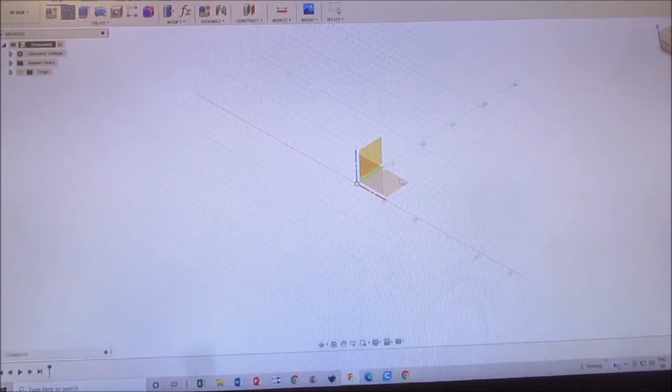And here we are in full screen. I'm going to start off with a sketch, put it on the top view. There it is. And this is set on millimeters, I believe. Yep, okay, so we're going to start off with a sketch.

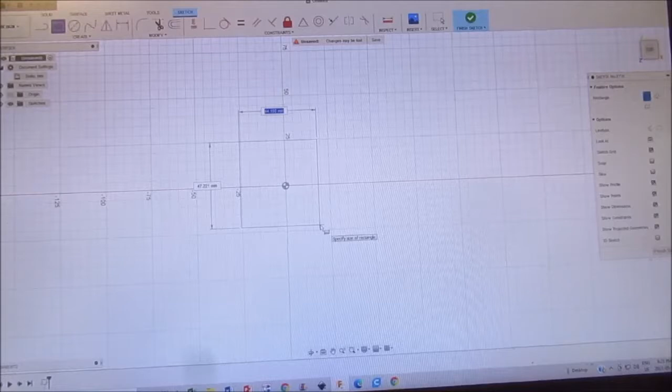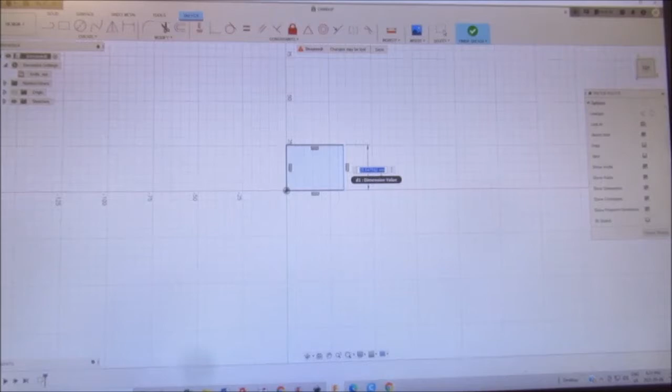Start off with a rectangle, and I'm going to start at the origin. Now I'm going to escape from that command and put some dimensions on here. I think, just for time's sake, maybe 45 millimeters, and go over here and do another 45.

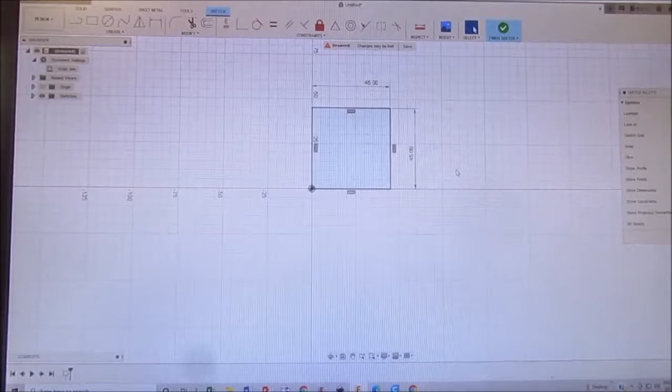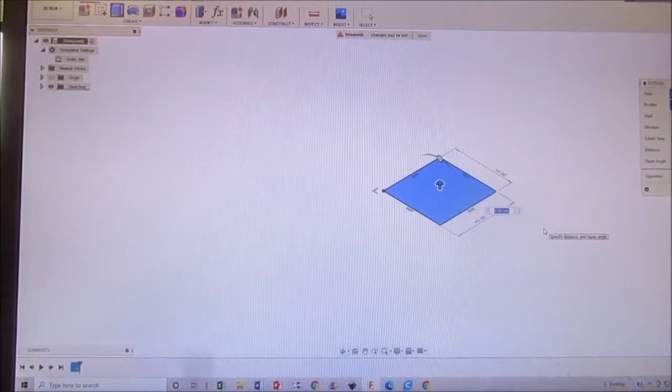Escape from that command. Now click on here and press pull. To save time, I'll go 4 or 5 millimeters, because if I go less it struggles with infill. Actually, the problem I had yesterday with the printer was the temperature was too low and it wouldn't stick to the build plate. But with this I'll go 4 millimeters, and there you have the plate.

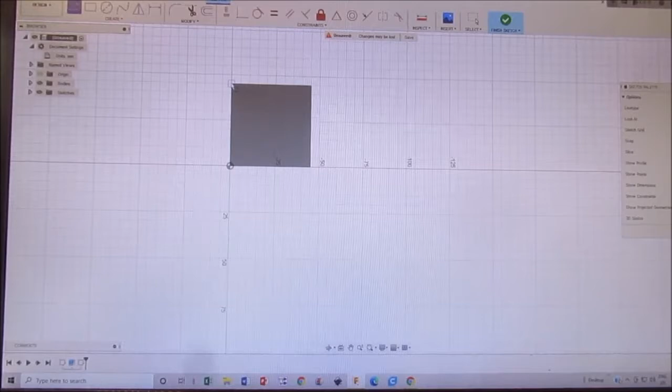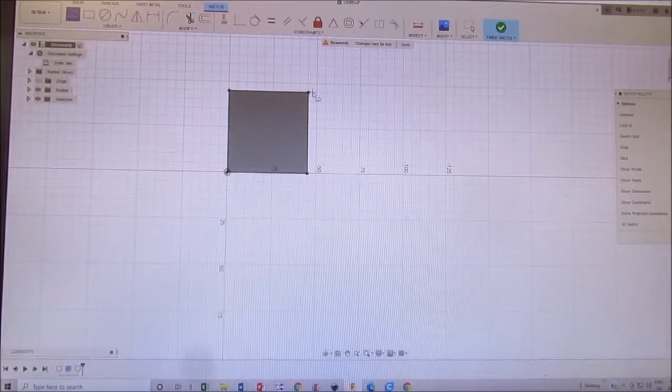Now on top of this, I'm not sure, the raised features are rounded off I think, but I'm just going to do another sketch on top of this and take a line, hit the corners. This is going to be my raised edge, but normally I wouldn't do this with corners where you can stick your finger or something. It's not really people friendly if you do it that way.

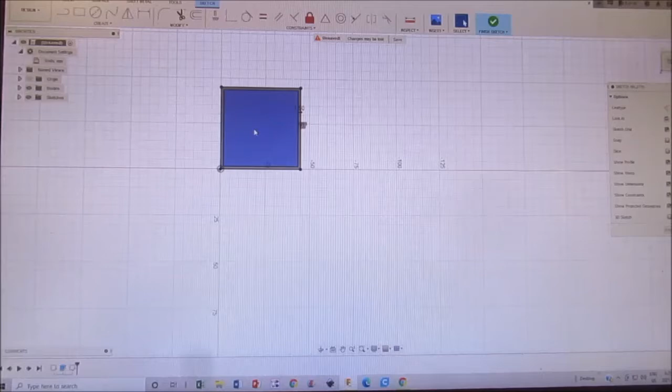But this is just for prints' sake, a quick proof of concept I should say. A millimeter should be enough, but I'll go 1.5, and that's my contour. Now I want to poke a hole in that, if I could find the center of this thing. There's the center, that's around a 10 millimeter hole I have to put in there.

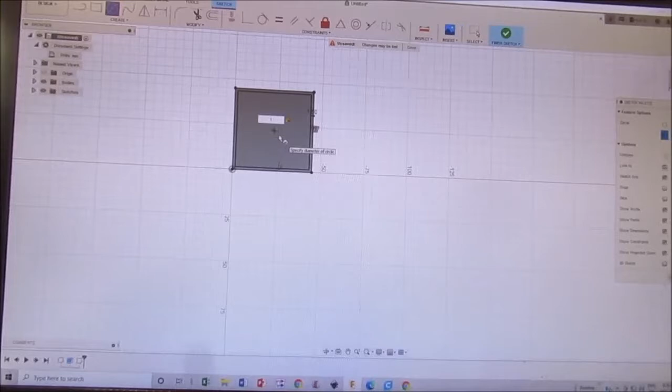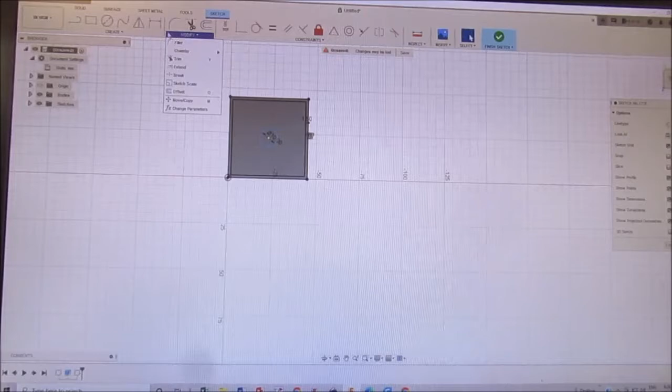And some text, right, so I'll put 'on' here and 'off' on the bottom. So where's my tools? Text, tools, modify. Alright, for some reason it snapped onto the grid. Just repeat the text and go here.

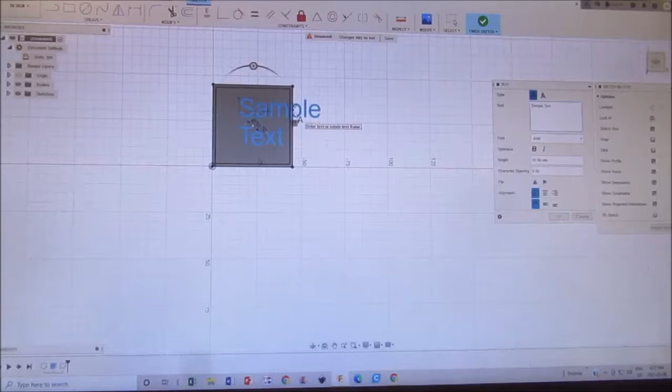Sample text, we're going to put it in capital letters. And then, oh, I have to click OK over here. Height is on 10, I'm going to put it at 8 maybe, or 7. That's more like it.

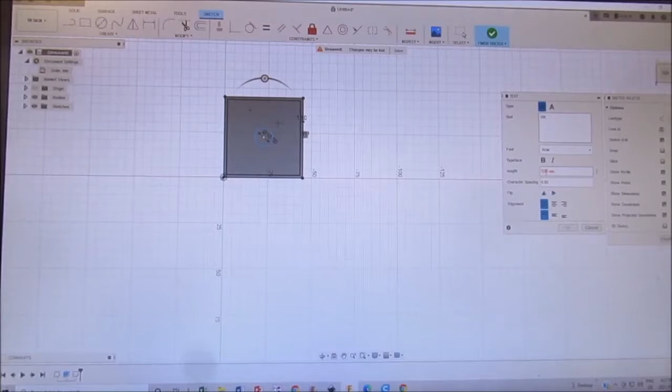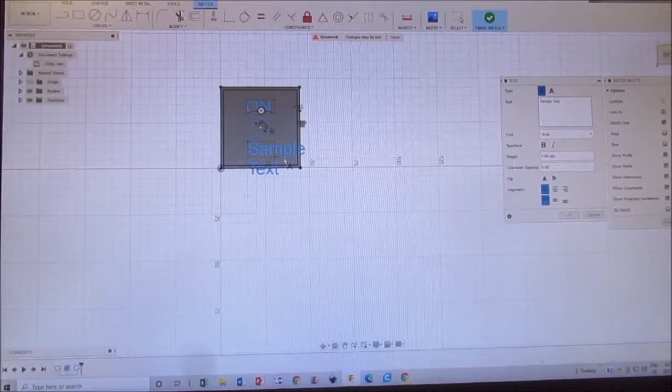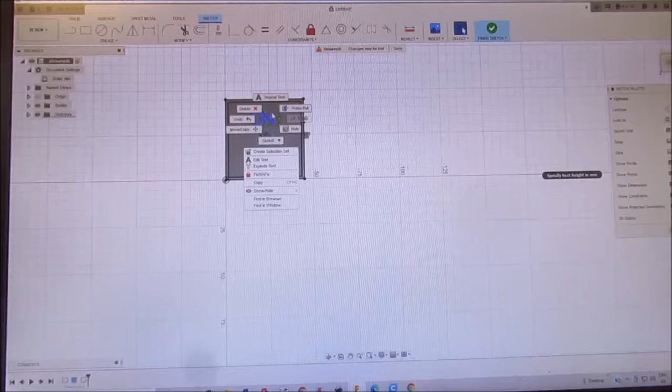Do the same thing again, repeat text, go here and put an OFF. Okay, I'm going to put it in bold. Click OK. Edit text, I'm going to put it in bold as well. Okay.

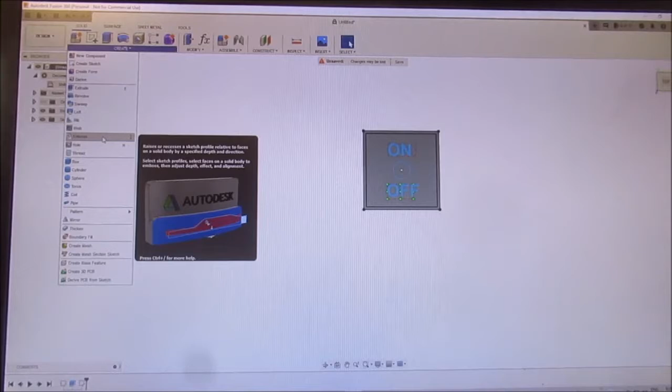Emboss, I think. What's emboss? Oh, raised. That's what I'm going to do. Emboss.

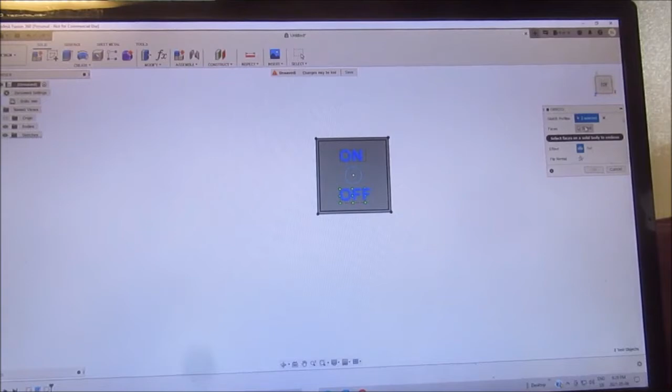Sketch profiles, faces - that one. I have selected, and 2 sketch profiles. Select faces on a solid body to emboss.

Now what happens if I click OK to this? I can raise it or embed it. I'm going to raise it.

Inspect and section analyses, and I go in here. Yep, it's raised. Okay, I have to know by how much though.

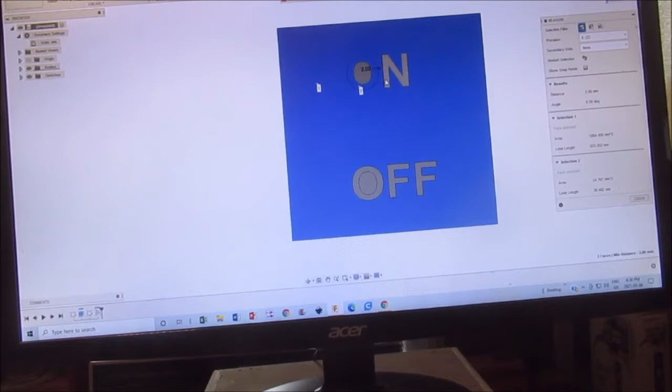So I'm going to cancel this and inspect with my tape. It's 2 millimeters - that's by how much they raised it. Oh sorry, you're crooked.

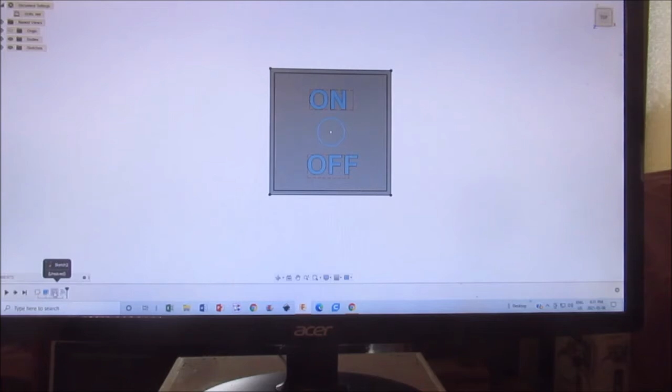Okay, so now I'm going to raise the edge if I can. If I go back in the timeline, and go back to my sketch, or I should be able to click on this if I... No.

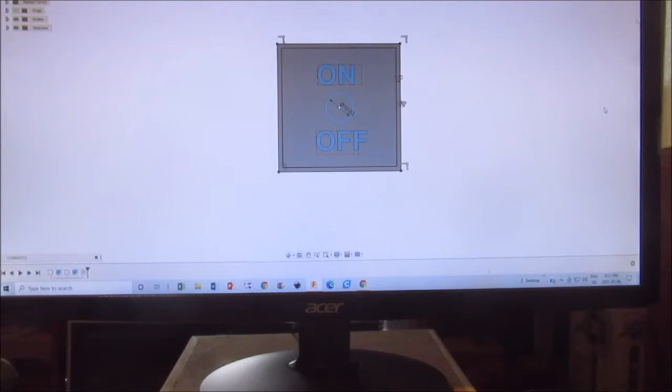This surface, press pull, and I want 2 millimeters, the same as the text. And I'm going to join it. Okay.

So now if I... oh sorry. If I go here and close off my sketches, I'm left with this. There should be a hole right here. Oh no, it was part of my sketch.

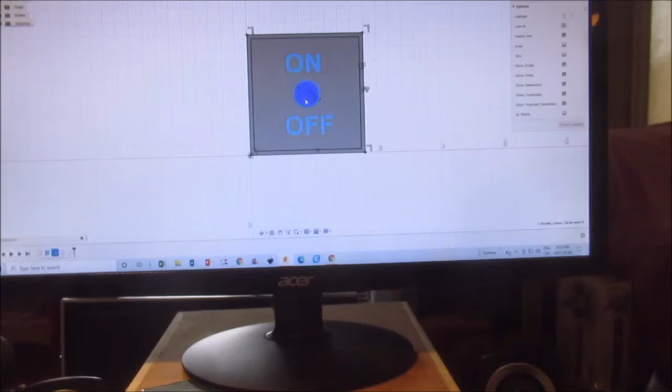I didn't press pull. Okay, go back to my sketch. Edit sketch, go here, press pull, and I'm going to go -10 just to make sure I make it through. And it's on cut - cut away.

There it is. So I'm going to print 2 of those, and I want to see if that ironing command is going to just do the top of these, or it's going to do this and this at the same time, or just one of them.

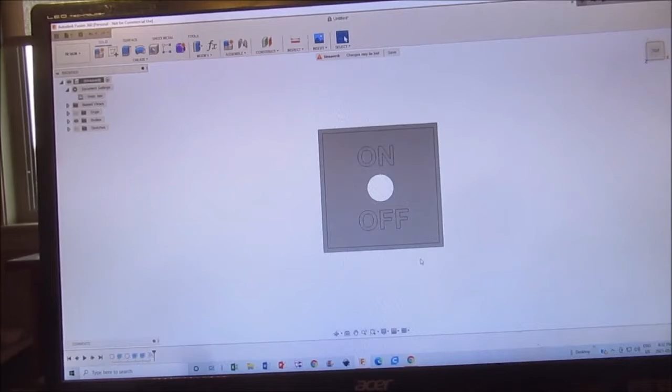So I'm going to get this to Cura. Okay, so this component - I have to create a component so I can actually click over here and create an STL. That way I bring it over to Cura.

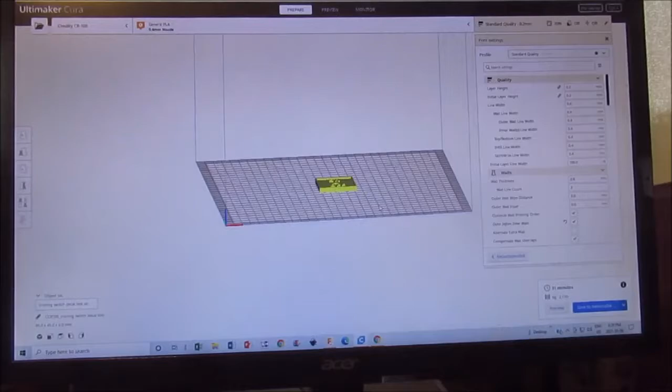There it is on the build plate. Get a better look at it. So here,

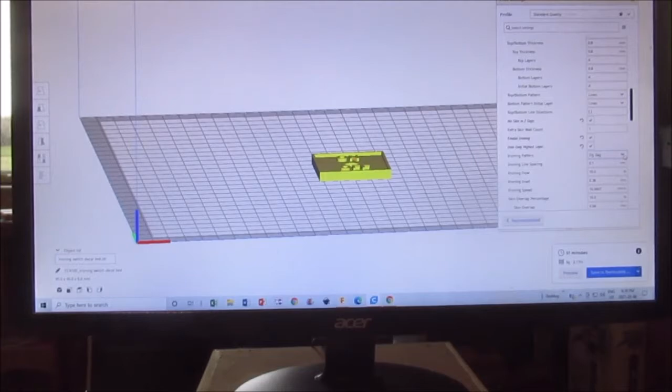I'm going to leave everything alone except for that ironing command. Ironing enabled - I don't want a zigzag pattern. Now concentric would mean a circle, wouldn't it? I don't know.

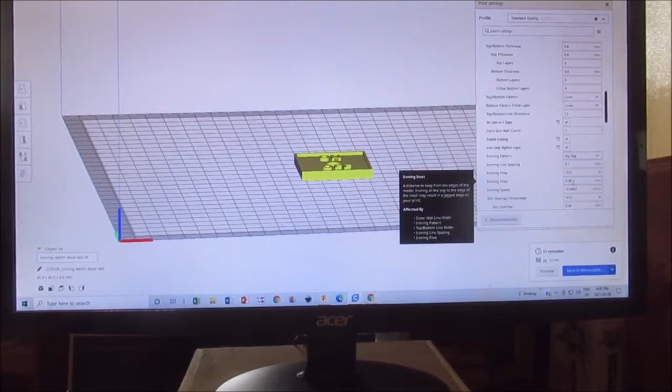Okay, ironing spacing 0.1, flow 10%, inset - that's from the edges, you don't go right up to the edges in this command. The speed 16, so it's slowed down a bit compared to 50. It's like 60% to 65% slowed down, if not more.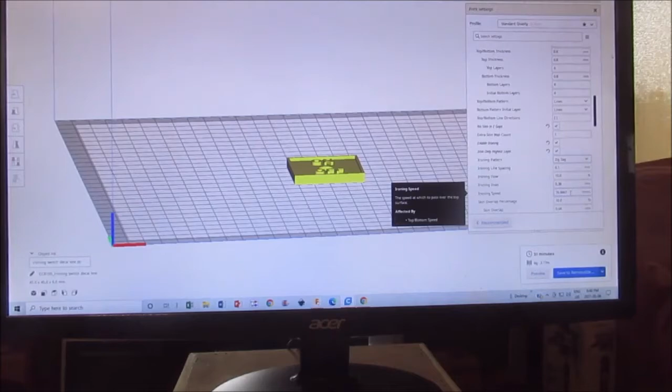Alright, so I'm going to save that. So the first one's going to be with, and the other one's going to be without.

Well, the 2 prints are done, and they're right here. And there is a difference. There's something that I didn't notice when I first started out making these about the command, and I'll tell you that later at the end of the video.

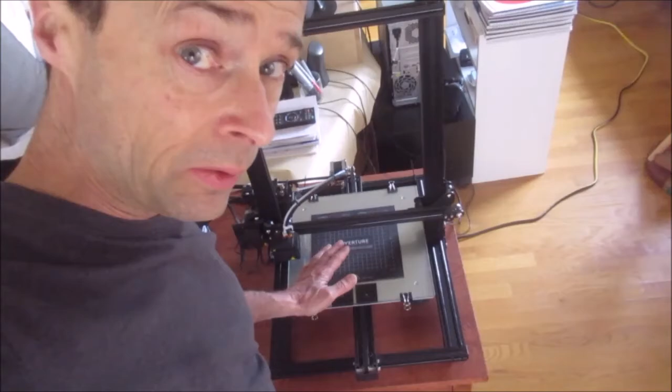Okay, this side has the ironing command on, but it was only on the top layer. If there's a checkbox you can check - it says if you put the ironing command on and you don't check this box, it's going to make every layer smooth.

The print's a little bit more difficult, and the print came unglued from the build plate. It didn't adhere to the build plate anymore because there was too many layers and too much heat being put into the part.

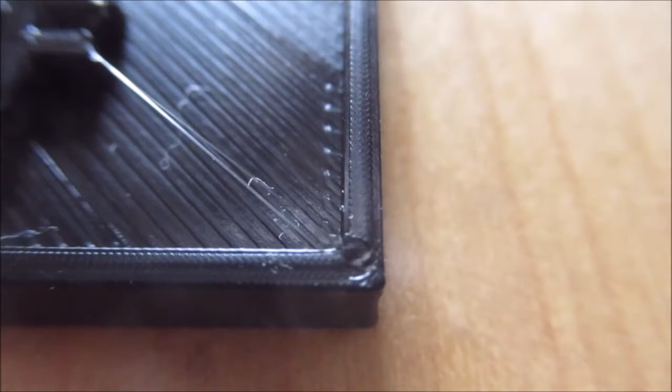Okay, so this one has that ironing command on, and you can tell the center - in the center of that bead - that the outskirts is risen, right?

And you can tell it's smooth. But if you look on the other one, you notice 3 paths. There are 3 paths going on. Maybe even 4 in an overlap, you know? But you can see the path.

It's more evident on this piece. Compare that to that. You can tell it tried to smoothen out the center or the middle of these prints.

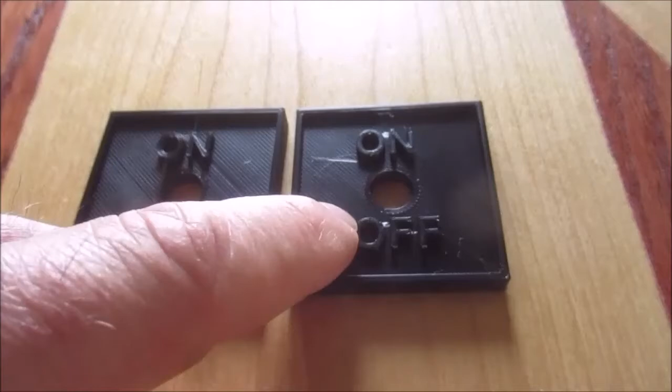So you can put the ironing command on throughout the piece to get that surface smooth, and the rim - everything you see can be smoothed out. But it adds more time, and sometimes it comes undone from the build table.

And this is the quality you'd get without that smoothing, that ironing command.